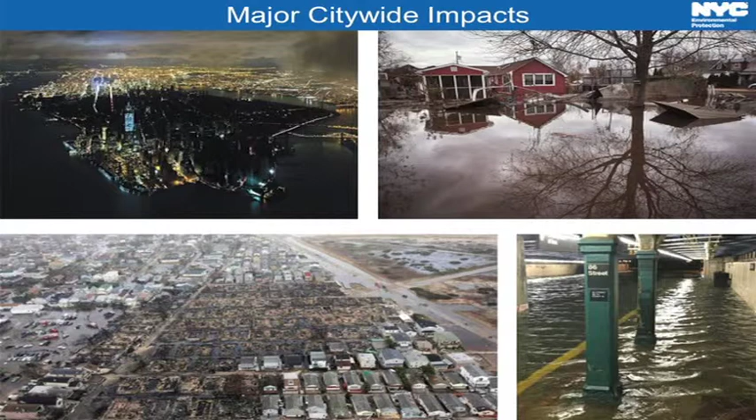In the lower left, that's a picture of Breezy Point when seawater hit electrical service, and it was whipped by 60-mile-an-hour winds, 100 homes burned. It was not for lack of water that it wasn't put out. We did have adequate water, and that's one of the success stories that New York City Department of Environmental Protection is very proud of. We had adequate water throughout, and it was really due to the investments made in our infrastructure over 100 years ago.

7 subway tunnels under the East River flooded. The Brooklyn Battery Tunnel was flooded from end to end.

Even the Queens Midtown Tunnel took on water. Whitehall Station, which many of you may use in southern Manhattan, was completely flooded out, buried under 80 feet of water. That was a just-completed $500 million renovation, so they have to start over again.

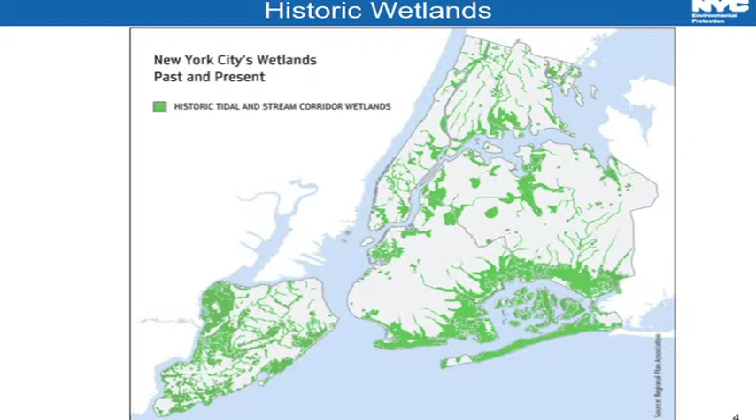But here's one reason why we need to think about this, and it's a big issue in New Jersey, I know from my past life, in New York City as well. We've built out here, but these are our historic wetlands in the area. Decisions about where to build and how to build have to be informed by our history, because look at that, it's pretty much complete overlap with the areas that were flooded by Sandy, which was a 1-in-500-year storm. All of the Rockaway Peninsula, of course, but major parts of Coney Island, Gerritsen Beach, Staten Island were flooded.

You can see it overwhelmed really the old maps — now look at this, this is the 1983 FEMA maps, as Secretary Donovan mentioned. New maps are out, which encompass a lot more areas, including the new World Trade Center site. So we're thinking quickly and deeply about what to do with this, but it was in excess of the 500-year flood zone in New York City.

Well, as we think about rebuilding, obviously where we build and how matters, and our building code is being looked at now. There's certainly going to be elevation of critical equipment and the like in structures. There's also going to be more homes like Cape Hatteras that are on stilts in the V zone, which is the high wave zone. But when we think about rebuilding, we have to avoid what a group out of Harvard calls the resource trap.

The Zofnass Group for Sustainable Infrastructure calls it the resource trap, and we at New York City DEP are well aware of it. You heard Michael's numbers — in the future, nearly $34 billion in New Jersey for the water systems. In New York City alone, about half the state, on the drinking water side, in the last 10 years we've spent $20 billion. And our capital plan for the next 10 years is about $14 billion. It's a lot of money.

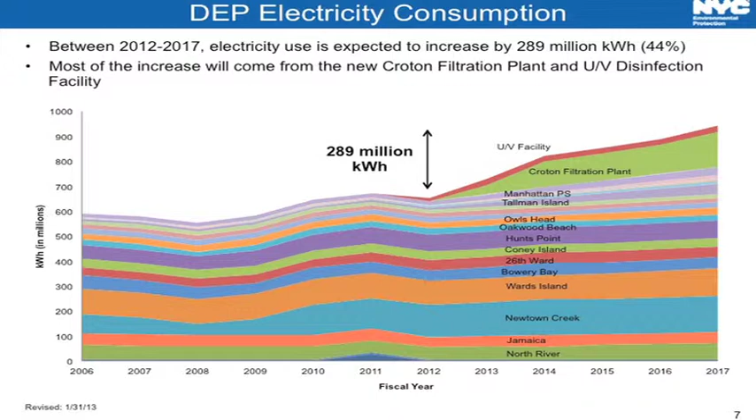Increasingly, as we add pollution control technologies under current technology, it's energy intensive. Our electricity use is expected to increase 44% over the next few years.

The UV facility is the largest UV facility in the world. We're going to cut the ribbon on that this spring, and that's treating the water from our bigger Catskill, Delaware system. Croton filtration plant, we're building at a park in the Bronx, and that's treating our old Croton system, first developed in the 1840s. That requires a lot of energy, and this is the wrong direction from where the mayor has told us to go.

Which is to decrease our carbon footprint by 30% by 2017. It's going to be hard for us to hit that. All told, the city has decreased its carbon footprint by 16% compared to a 2005 baseline, which is impressive progress, and is due to a lot of innovation on the transportation side, also in the energy mix.

But the takeaway from this slide is that when we rebuild, we have to think holistically. We can no longer afford having the water silo and the air silo, because if you squeeze one part of the balloon, the other part will go up unless you're thinking smartly.

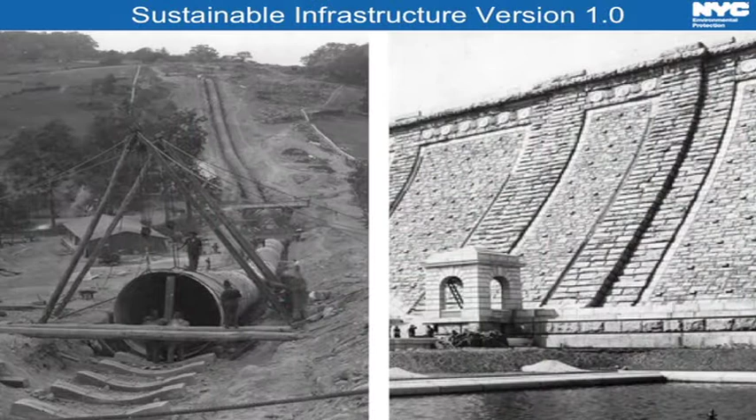Well, we can look into the past for a little inspiration. One is the sort of first version of sustainable infrastructure, 1.0 as I call it. The picture on the left is our cut and cover Catskill Aqueduct built between 1907 and 1917, largely gravity fed. So again, that water is driven not by pumps, but by gravity from about 1,200 foot elevation to our distributing reservoir just north of the city at 300 feet, and from there to the city.

Obviously, we used a lot of sustainable, locally sourced materials built to last so that they can be revamped at very low cost. A lot of very highly skilled artisan labor from Italy, actually, built what's here is Kensico Dam. So those are things to think about.

And our industry going forward is starting to think about sustainable infrastructure. I mentioned PlaNYC, the mayor's plan. Now in its second iteration, it gets refreshed every 4 years. Envision is a very new but very exciting rating system, similar to LEED for those of you who are familiar with residential construction. This is to fill the gap on the infrastructure side. How do we make sure that roads, bridges, water systems are sustainable?

And a group out of Harvard School of Design called the Zofnass Group has gotten together with the Institute for Sustainable Infrastructure and published these guides. Envision, it's now in its second version.

And finally, our industry, the wastewater industry side in particular, has published our blueprint for action for the utility of the future. And the basic conception here is we can no longer afford single-purpose wastewater treatment plants, for example. We have to look at them as resource recovery.

Well, on the wastewater side, let's focus on that a little bit. This is the current approach, which we call gray, reflecting the amount of concrete that we have to use. We have spent on the wastewater side alone about half our budget over the last 10 years, or $10 billion, including major upgrades at our largest wastewater treatment plant. You can see the digester eggs, which are going to produce all that nice methane on the left. Also, combined sewer overflow is a big problem in New York City as well, our #1 water quality concern.

This is the old approach. This is a big $400 million, 50 million gallon capacity plant that we built and opened in the Jamaica Bay watershed. It stores wastewater, storm passes, gets pumped to the plants, can get treated. That's great. It happens about 50 times a year. It has improved water quality, but 300 days a year it sits idle, and I don't like paying for that, certainly, and my ratepayers don't like paying for it either.

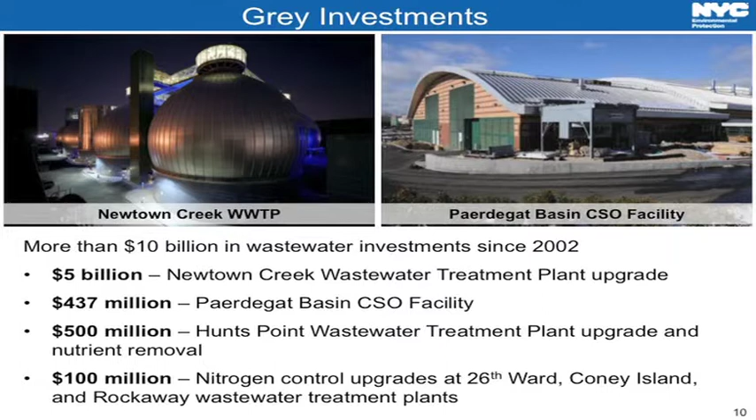We think there's a smarter approach, happening in conjunction with gray, because our first generation of gray infrastructure is very cost effective on a dollar per gallon basis. As we look forward to deep storage tanks and tunnels, deep storage tunnels and surface tanks, it gets less attractive very rapidly. So we're looking at alternatives.

Green infrastructure is a way to do it, and when I mentioned earlier that our infrastructure is invisible, it's no longer going to be the case, and people are going to understand what it takes to keep the city clean and green.

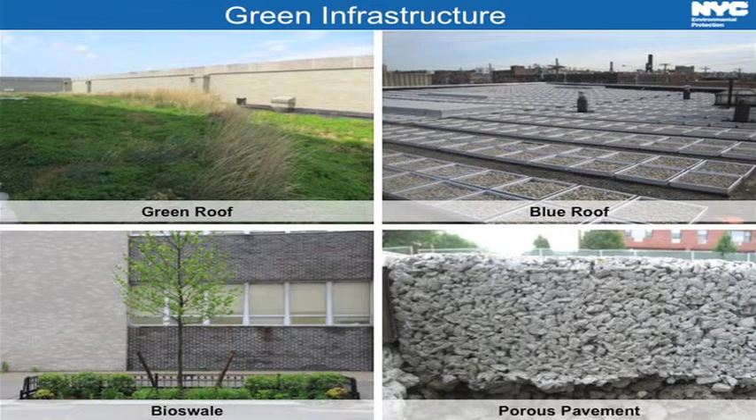Includes things like green roofs. This is on the Bronx Courthouse. Blue roofs, which are just without vegetation, but they store it in these very inexpensive pans, essentially filled with ballast with holes drilled in them. Very simple technology and very cost effective.

This might add $1 per square foot to construction costs, running about $400 a square foot now in New York City. Bioswales in the public right of way, which are basically fancy tree pits with some storage underneath. And porous pavement, which we think has a lot of promise. There's a lot of paved surfaces.

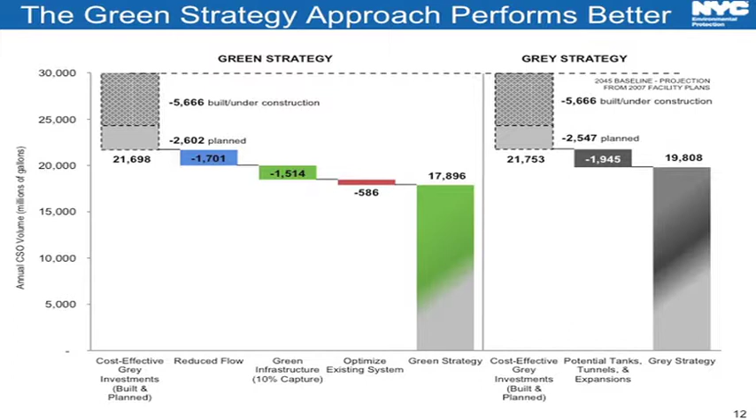Well, a few years ago we published the New York City Green Infrastructure Plan, and we looked at the green versus the gray strategy. We have to, like all good planners, estimate what the future impact will be. And we thought all told, in combination with, look at that box in blue, reduced flows, very important. People talk about conservation as beneficial for supply and energy use, but also less water, less base flow through the system helps us deal with storms easier. Some optimization and green infrastructure, we can get to a better place than if we built a few tanks and tunnels that were under consideration.

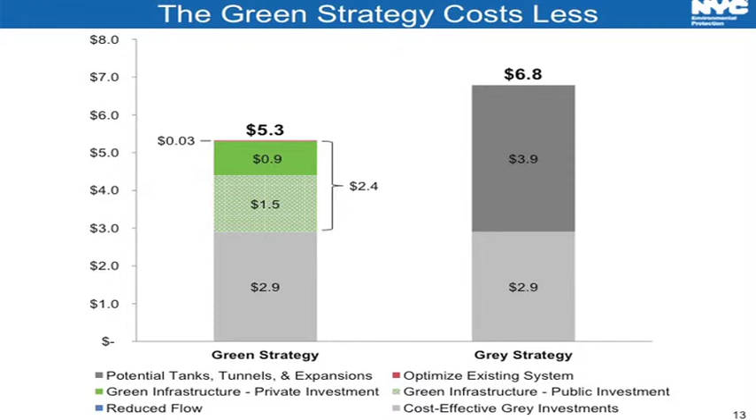Here's a number I like, it costs less. So you can see the public investment, what we spent already and are committed to spend is about $2.9 billion. If we add on another $1.5 billion in green infrastructure, investing in those green roofs and bioswales, which we've committed to do, and the private sector kicks in nearly $1 billion, $900 million under new development regulations, which we've adopted in July of last year. The total investment will be about $5.3 billion. That's saving at least $1.5 billion compared to the alternative. So we think that's very important.

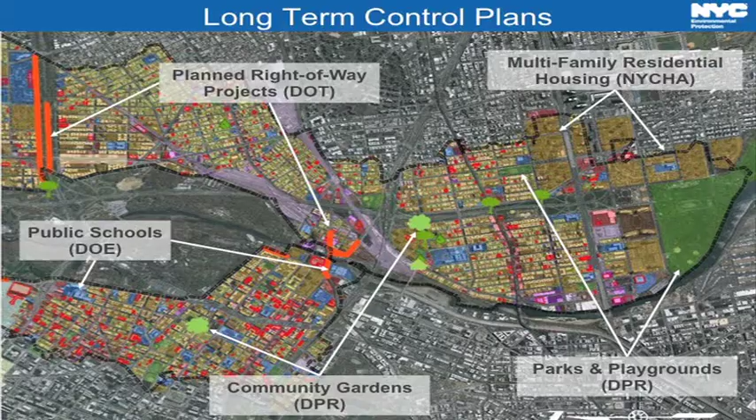Right now, and we actually had a meeting last night, we're going through and developing really our second iteration of long-term control plans. Our first baby long-term control plans were facility plans, and that led to that $2.9 billion in initial investments. Here we are in the Bronx looking at how do we, on a landscape basis, develop partnerships with New York City Housing Authority, parks, public schools, planned right-of-way areas, and model those benefits and take advantage of it. So we are very much in the nitty-gritty. We're developing 11 of these plans over the next 5 years.

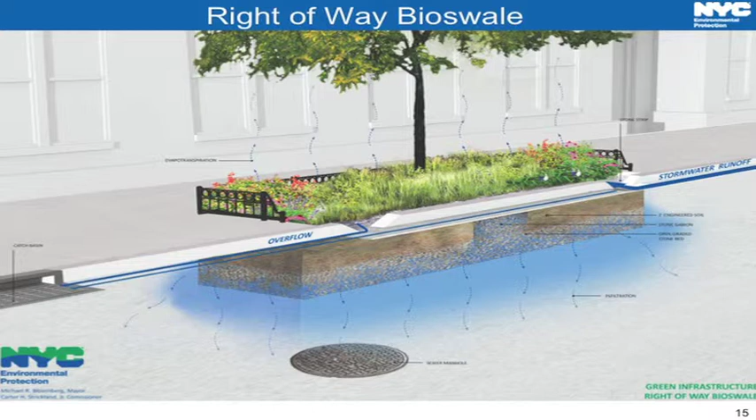It's very simple, and here's, in a decentralized infrastructure, the key is scaling up rapidly, and this is what we're doing. We're going to build thousands of these bioswales, probably all told 10 to 20,000. And it seems like a big number, but it's not impossible. We currently maintain 148,000 catch basins in New York City. We also maintain nearly 110,000 fire hydrants in New York City. So we're used to building decentralized and maintaining decentralized systems. Of course, it takes time, and that's what we work with our regulators to do.

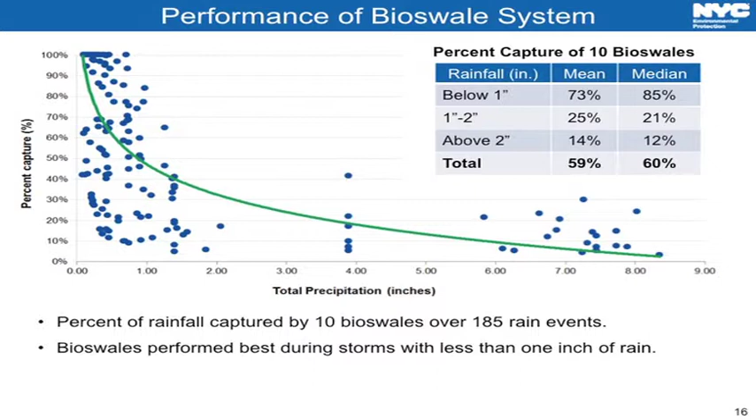But we're ramping up quickly. By 2013, in this calendar year, we're going to have several hundred of these throughout the city. By 2015, we're going to have 6,000. So you can see the water flows in, seeps, is stored there, doesn't get to the sewer system. This is where we're going to, you can see, by the way, this as a result of some of our pilot studies, the axis on the bottom is the total precipitation. Most of our storms are less than 1 inch, and our bioswale can handle 80 to 100% of that. This is where we're going to build it. We have to take an area-wide approach.

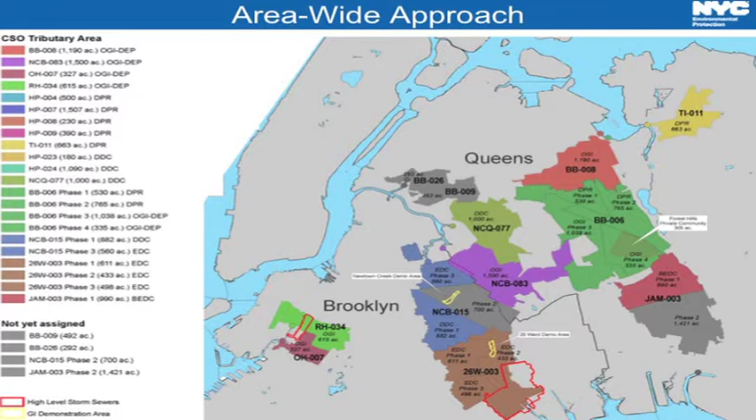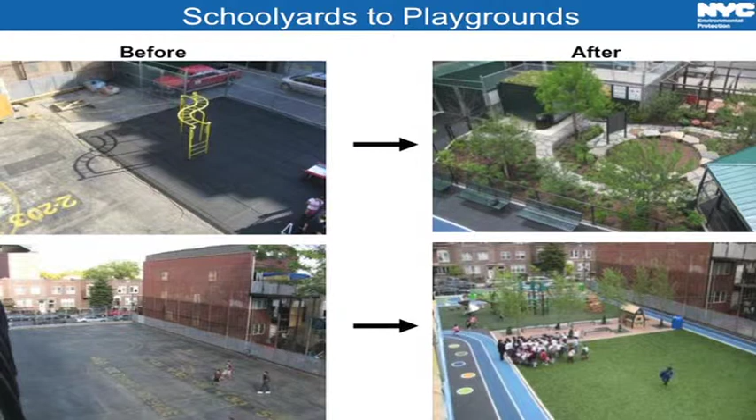Another big partnership we're very proud of is our Schoolyards to Playgrounds program with the Trust for Public Land, one of many nonprofits we work with. Here's the before version, and here's the after version of a first-generation Schoolyards to Playgrounds program. We're very excited to subsidize this to the extent that it captures water. Again, here's another image of before and afterwards. I think what this illustrates is the promise of green infrastructure as a way to clean up the water systems, because there are many benefits, and that allows you to add the water stream of money to the school stream of money to the local redevelopment stream of money, combining those so that you have a multi-purpose facility.

So that's part of our multi-pronged effort to build a greener, more sustainable city for the future. Thank you very much. Thank you.